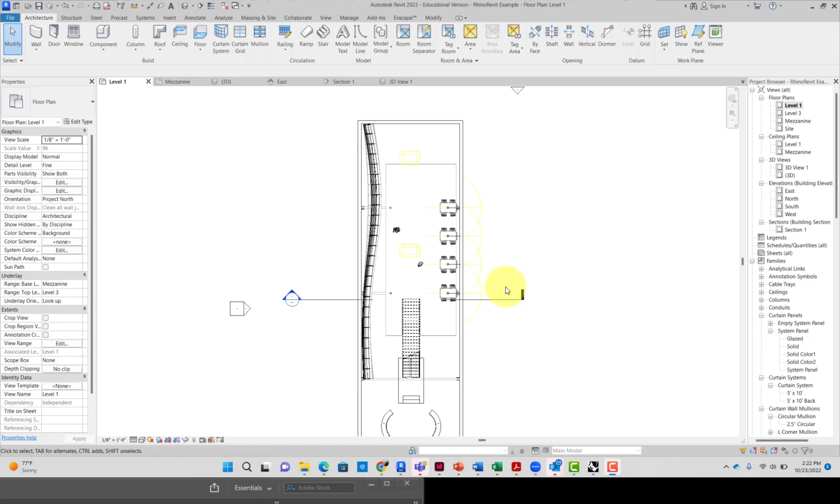Okay, guys, I'm just going to go into making restrooms. It seems kind of simple, but I think it's probably pretty important that you guys figure out a little bit of how this should work. Typically, in a building, you're going to want plumbing to all be consolidated. It doesn't always work out, especially in a small cafe where maybe the restrooms need to be more private, and the kitchen or back of house needs to be a little bit closer to the public.

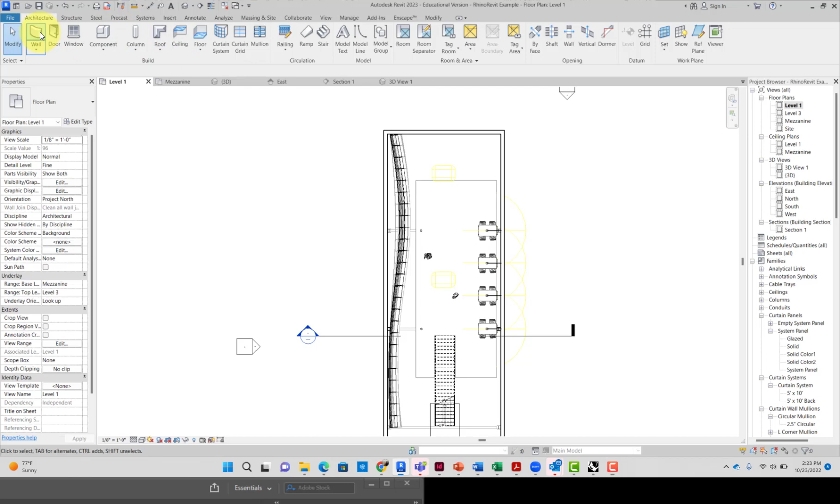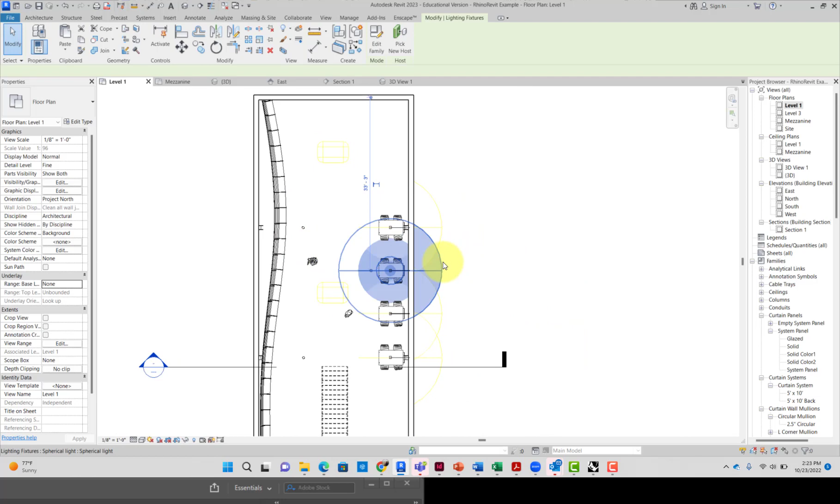But let's get into some basics. So I'm going to start drawing in. I'm going to put this 5-inch wall. I guess I'll do core exterior, and the reason I'm going to do that is I have turned on right here. If you've got this set to none, which is probably how you have it, everything looks pretty good. I may not want to show my light sources, but let's just pretend that's okay.

But I want to put this restroom right in here, but I do want to know where my mezzanine is because it's kind of floating. So what I'm doing is I'm turning on base mezzanine, and I'm going to have it look up. You can have it look down too, which can be really helpful if you happen to be on an upper floor and you need to see what's below. So just a trick about underlay. Just keep that in mind.

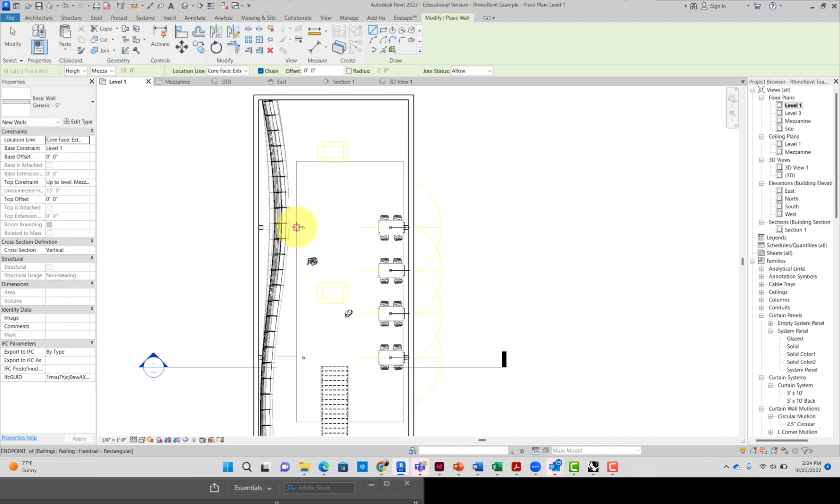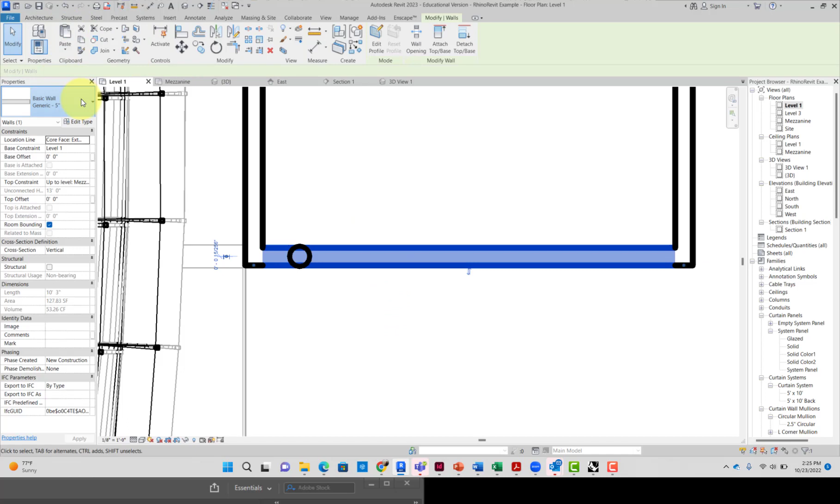I'll want to turn this back to none once I print, because I want to make sure the drawings are good. Okay, so now I can see it, and now I'm going to go back to wall. I'm going to turn this to core exterior because, as I'm drawing this, I want it to be aligned with the outside edge of the mezzanine. And then this wall I need to move a little bit, to encapsulate that column. In fact, that one might have to be a little bit larger just to really encapsulate the column. All right, something like that.

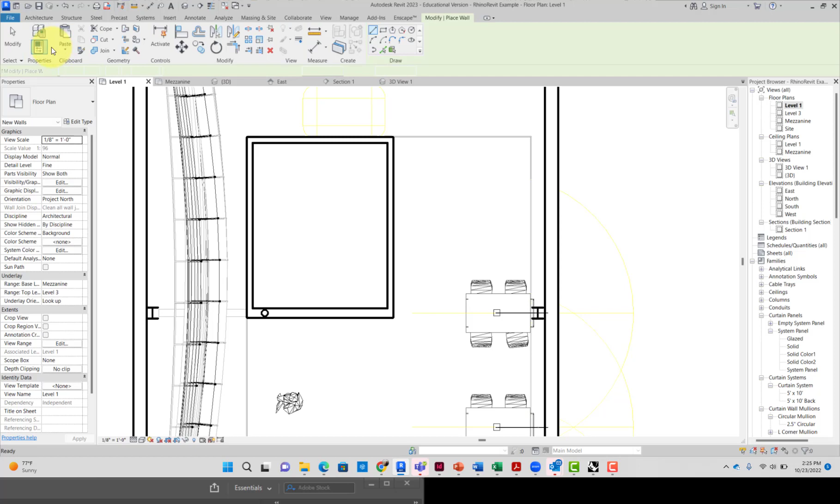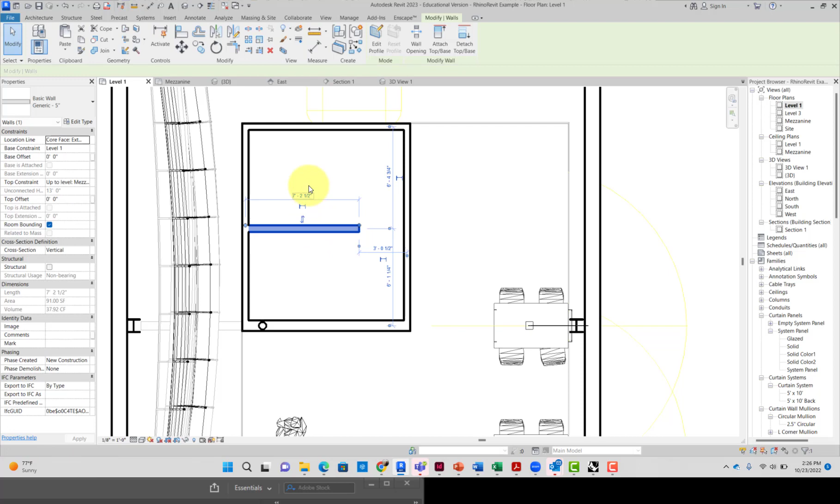Okay, so let's just imagine that you want to have two different spaces. I think the most intelligent thing you can do now is to make them both unisex, but that's client choice. So if I'm going to make this two spaces, if you have the space for it, you tend to want to put in a thicker wall wherever your plumbing's going to be. So if you're putting, say, your toilet here. Well, let's just have the toilet and sink area be on this wall.

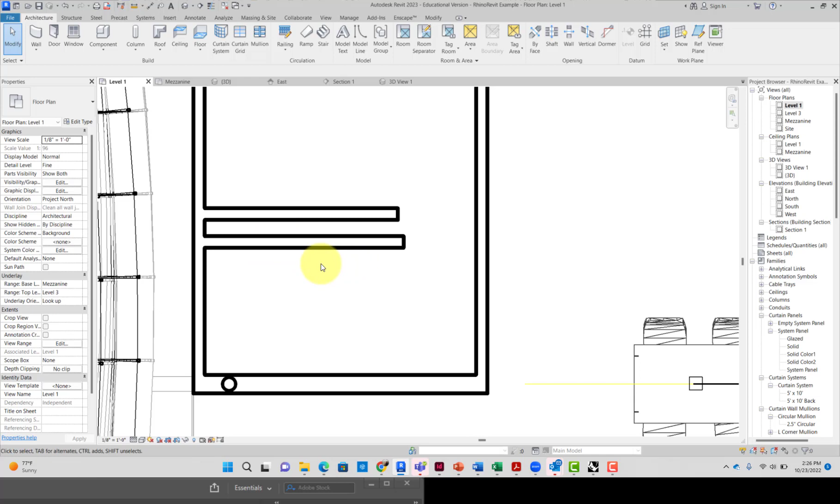So if you're going to do that, you'd double up, and essentially you're putting two walls in, which seems a little strange, but what that means is that all the plumbing can go in this cavity and then stick out, as it were. It makes the plumber's job a lot easier, which saves your client money. Okay, these guys are off, but we'll fix them here in a second. So then we'll just go like that.

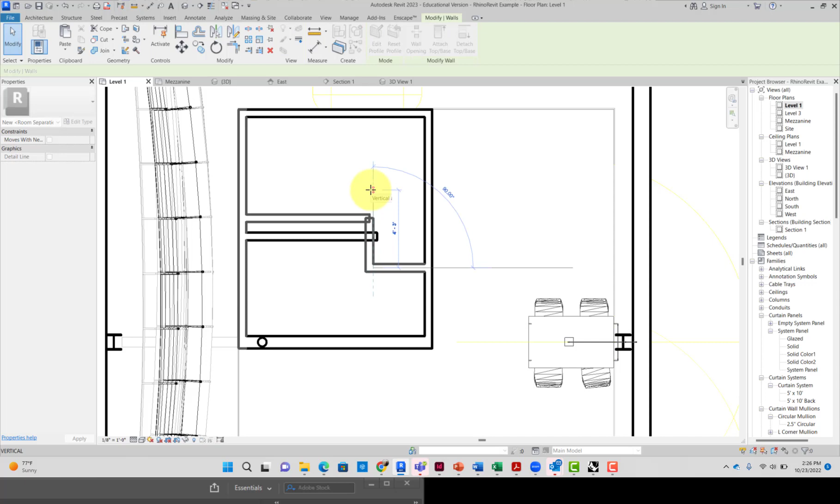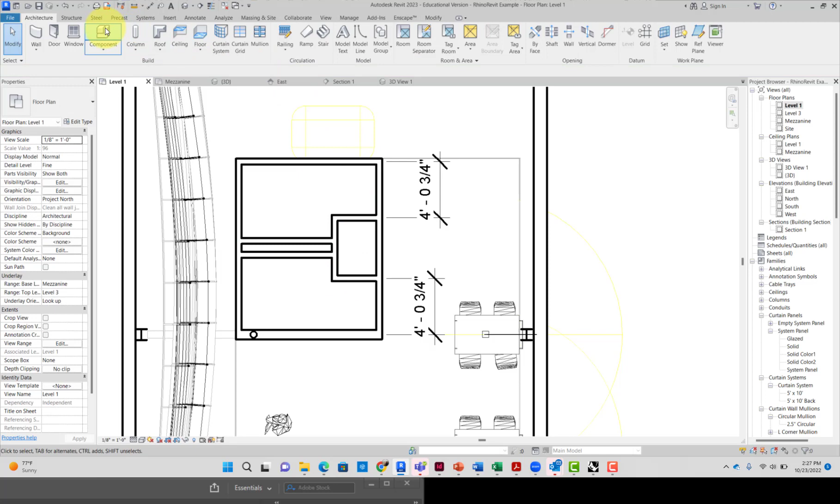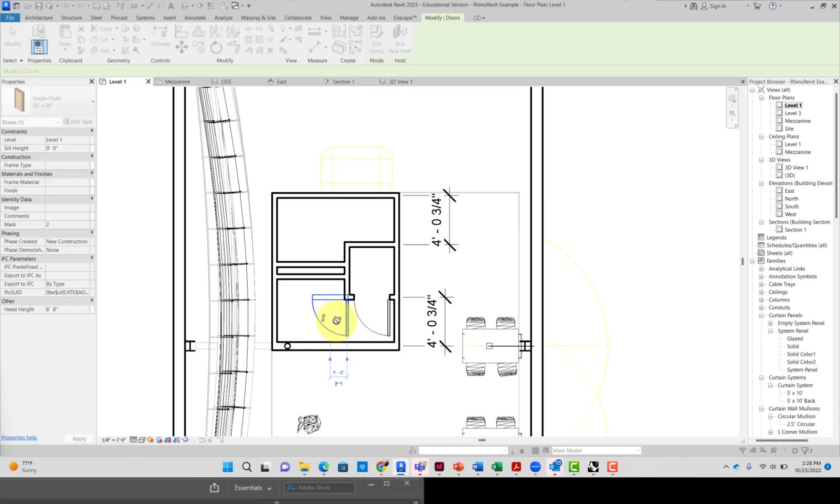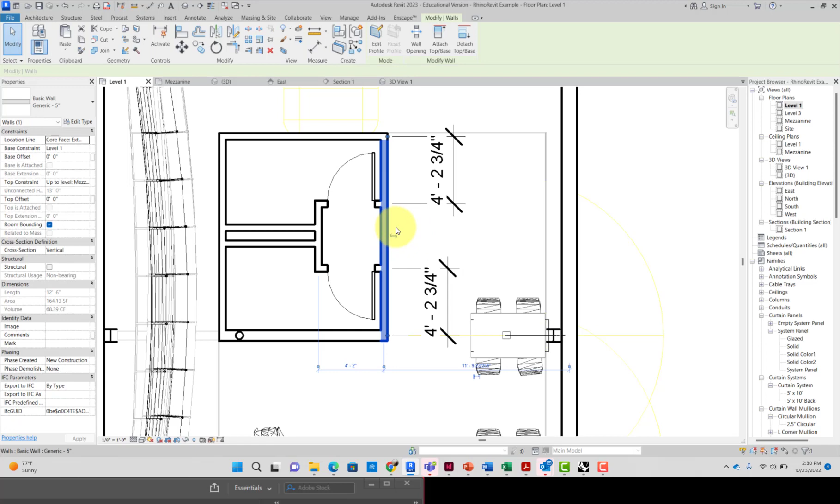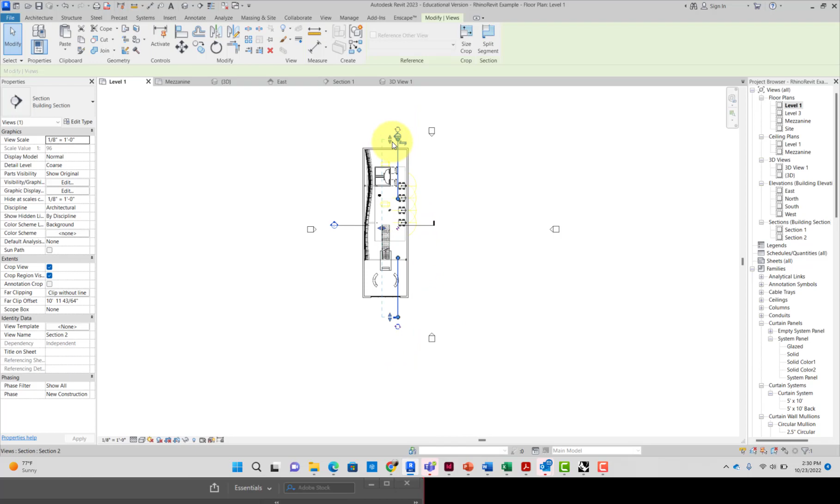And we'll go with one more door right there. I think we've done it in the stair project, but maybe it's a good thing to go over this. Do one more thing here. That will be creating a wall opening.

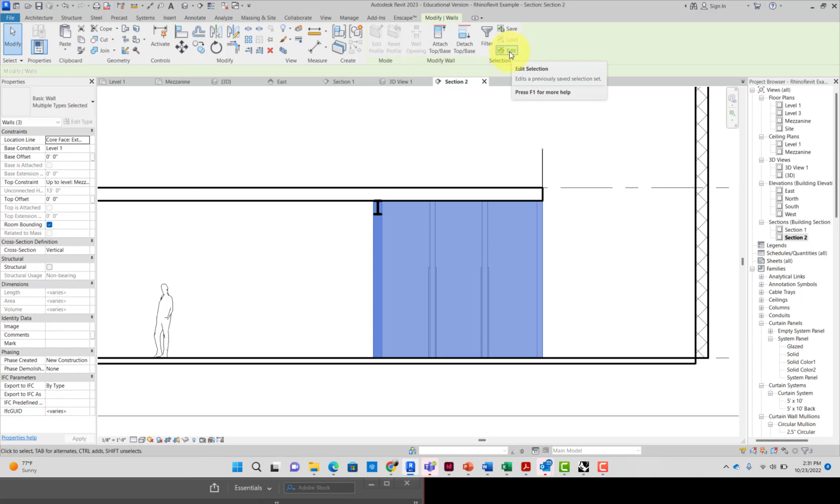Okay, so here's the restroom, and what I'm going to do is I'm going to select the wall. And then I'm going to do that again. I'm going to put a wall opening.

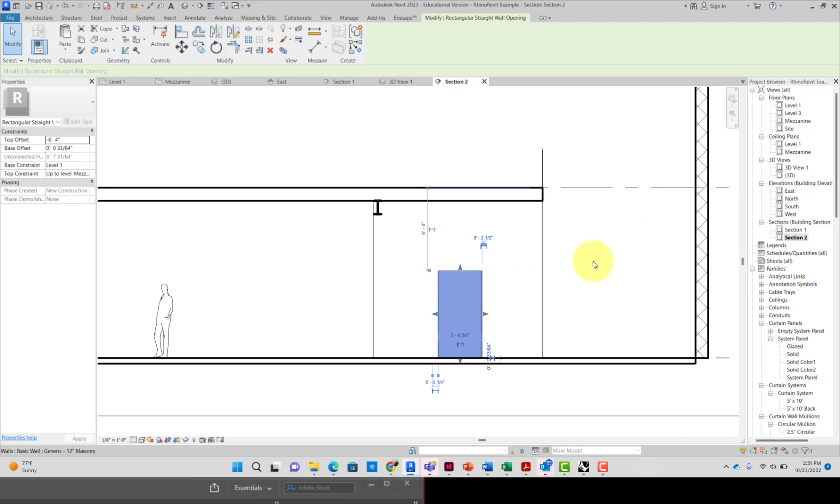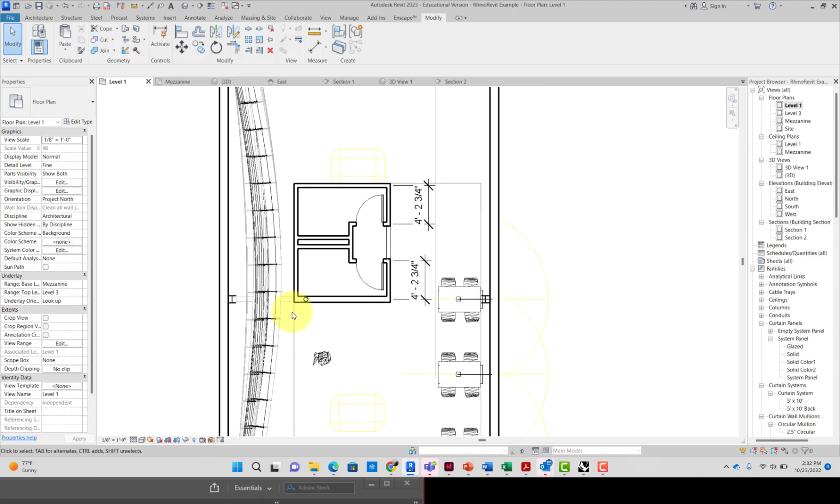Right now, I'm lining it with the doors and then the door height. And then here I'll have to adjust. And this would be a good time for alignment. Okay, so we can see what happened there. I just had a complete wall and then put a door opening. What that does is that in the section, instead of having a wall that stops and has this huge cavity, it's actually filled in that wall all the way through, and then it just has an opening for getting in.

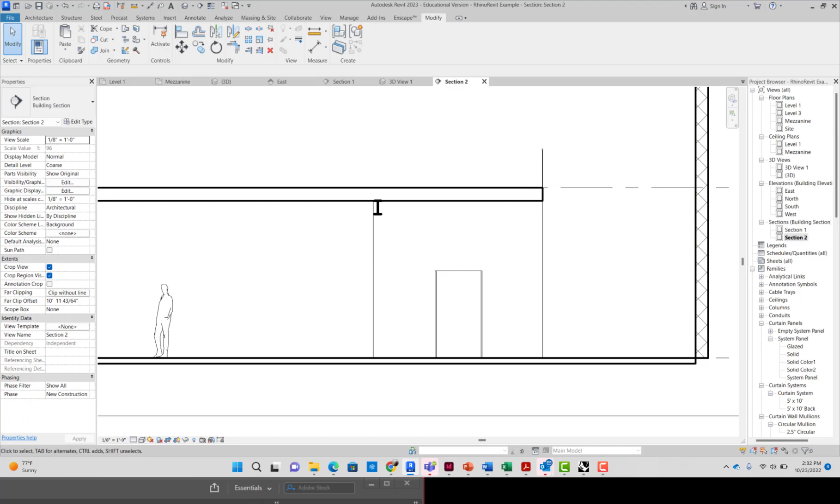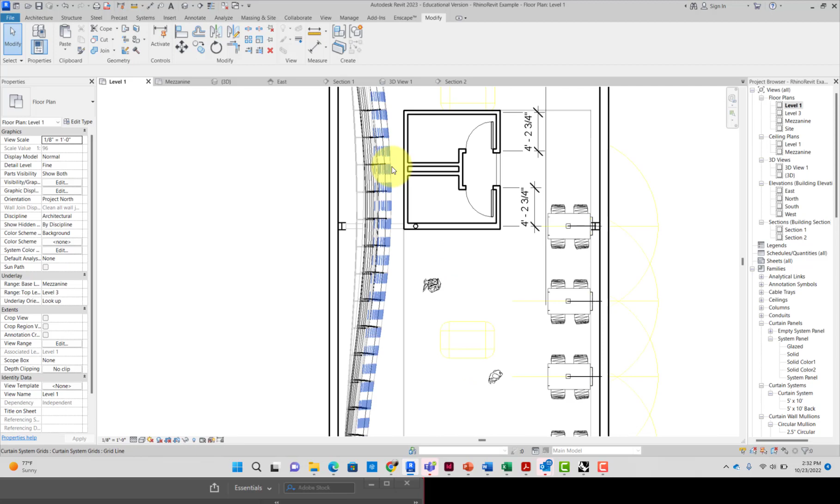All right. So that's just basics 101 and just getting a reasonable space where sight lines are being minimized here. It's in the private zone, and definitely sight lines from the larger space are not hitting your restrooms. I obviously have some crowding issues here, but I'm sure I can get around this. Overall, this is the beginning. We'll place fixtures next, and then we'll also talk about tiling this restroom and getting that stuff aligned.